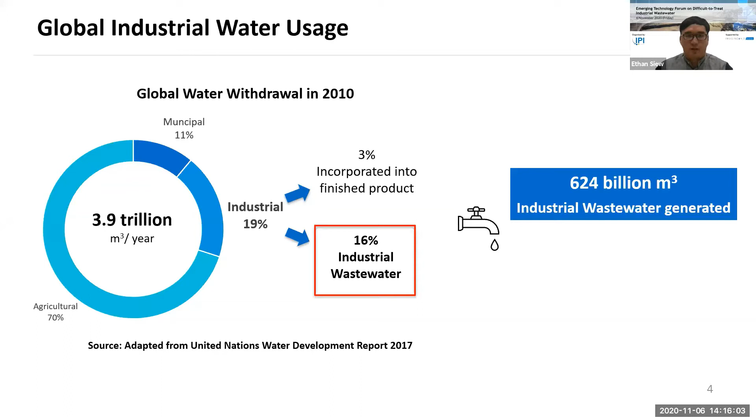Right here in Singapore, the situation is similar. The water demand is set to double from 600 million cubic meters in 2016 to 1.2 billion cubic meters in 2060. Non-domestic water, including water for industrial use, will grow from 55 to 70% in the same period.

With the rise in water demand and wastewater generated, the market will see a strong compound annual growth rate of 5.8%. The Asia-Pacific region is projected to be one of the fastest growing markets, growing 40% from 2019 to 2024. This growth is due to a growing population, rapid industrialization, and tightening discharge regulations in Asia.

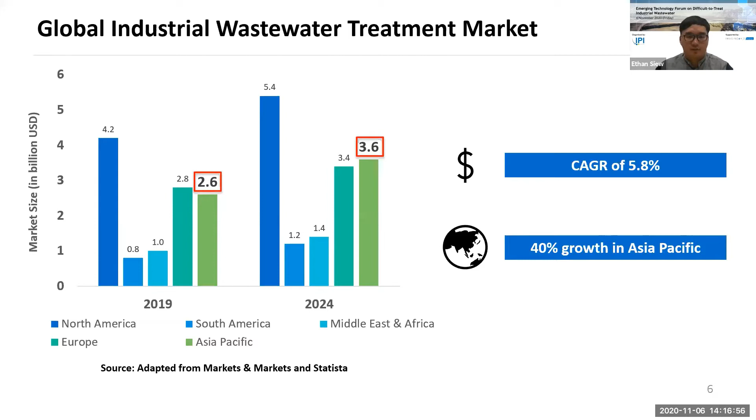So how do we manage all this wastewater? We can take some reference from the general waste management framework. When possible, avoid generation of wastewater through segregation of wastewater streams, or substitute the current raw materials with greener alternatives. Low-strength wastewater with low levels of contaminants is relatively easy to treat and should be recycled and reused when possible.

Mid to high-strength wastewater with heightened levels of contaminants can be challenging to treat and is required to be treated to a level fit for discharge as per the local regulations. If treatment is not possible, the wastewater will be sent for incineration. However, this comes at high logistical and management costs.

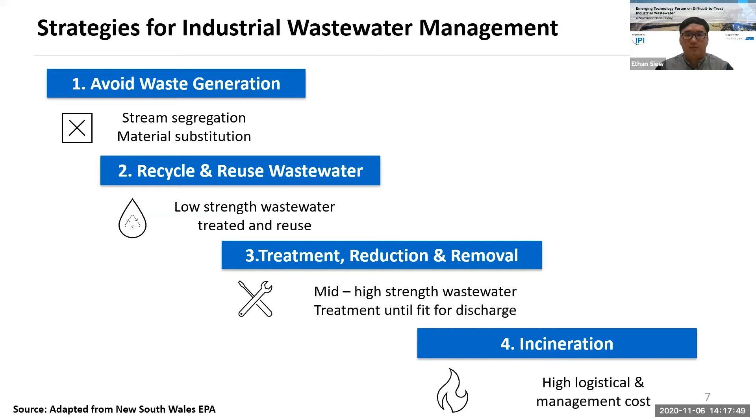Let us look at an example of how water is managed in Singapore's petrochemical and chemical industry. The bulk of the wastewater is generated by cooling towers and boilers. They are relatively clean and can be recycled rather easily. While process water takes up a small proportion of water used in the industry, the wastewater generated has high levels of contaminants and requires extensive treatment before it is fit for discharge.

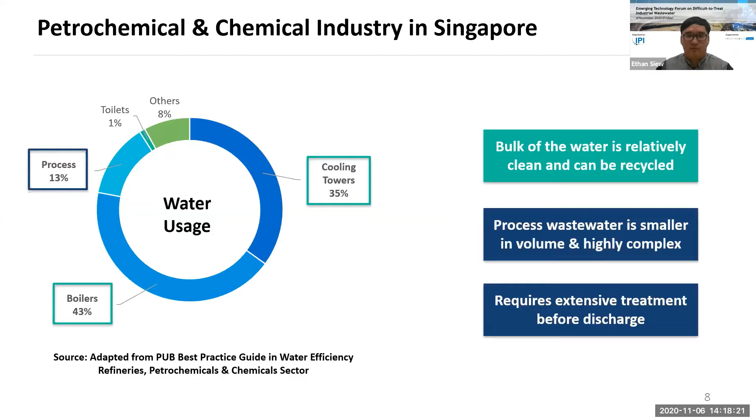We have seen the market trends in the industrial wastewater treatment sector. In this section, I'll be sharing with you some of the drivers moving these trends. There are essentially three key drivers for the industrial wastewater treatment market: the rise of industrial activities, tightening discharge regulations, and increasing environmental pollution awareness. First, we look at how industrial growth of key polluting industries gives rise to more wastewater.

The petrochem, textile, pharmaceutical, and paper industries are projected to see strong compound annual growth rates in the near future. However, things have changed significantly since COVID-19. Restriction of population movement has kept many people in their homes. Correspondingly, the energy demand for transport and commercial buildings has also fallen drastically.

For all the viewers watching this at the comfort of your own homes, I'm sure fashion has taken a backseat since the pandemic. At least for me, the only purchase I've made in the last few months were a few comfortable t-shirts.

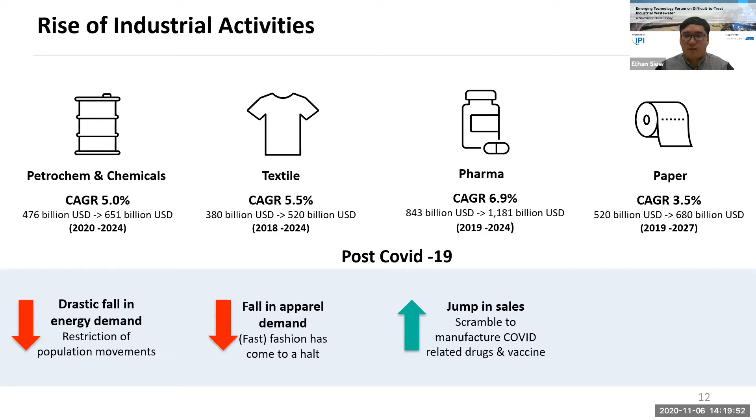It is not exactly all doom and gloom for all industries. There are still some bright spots. The pharmaceutical industry, for obvious reasons, has seen surges in its sales as all of us scramble to try and manufacture vaccines and COVID-related drugs. During the pandemic, the paper industry has successfully pivoted to making hygiene and medical-related products due to the increased demand.

Next, we look at some of the discharge regulations and related measures around Asia. Southeast Asia's largest economies, Indonesia, Thailand, and the Philippines, have seen their fair share of non-compliance for industrial effluent discharge. And this will continue to be a challenge for local regulators as the countries continue to invest in basic water and wastewater infrastructure to make up for the shortfall. In Singapore, PUB has ramped up efforts to detect and fine illegal effluent discharge, and tariffs are in place for discharge exceeding the regulations.

Looking beyond Southeast Asia, let us examine the situation in China and then in India. Before 2015 in China, there was little incentive for the polluters to recycle and treat wastewater, as the water prices and discharge fees were low. In January 2015, the Environmental Protection Law was revised to impose stricter fines and penalties. Enterprises were also named and shamed for environmental violations. In India, the effluent discharge of heavy polluting industries is constantly monitored in real time by the Pollution Control Board. The factories have to meet the discharge standards or face immediate plant shutdown.

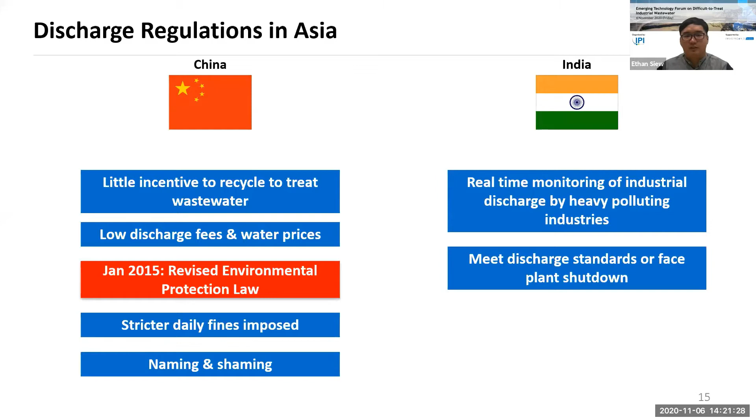Finally, let us look at a shift in mindset among investors and the general public towards environmental pollution. Investors are viewing practicing sustainability as a means to mitigate risk due to increasing regulatory and climate change. Likewise, consumers are demanding enterprises adopt sustainable practices in their manufacturing process. In response to that, the fashion industry has banded together to form Zero Discharge of Hazardous Chemicals, a foundation founded in 2011 by various players in the apparel supply chain to eventually eliminate any waste discharge during the manufacturing process.

At the minimum level, the Foundation seeks to meet legal discharge criteria and ensure effective control of chemicals in the restriction list. On the progressive level, the Foundation members should be able to apply advanced water treatment methods to address the wastewater issues. Lastly, on the aspirational level, no waste should be generated at all.

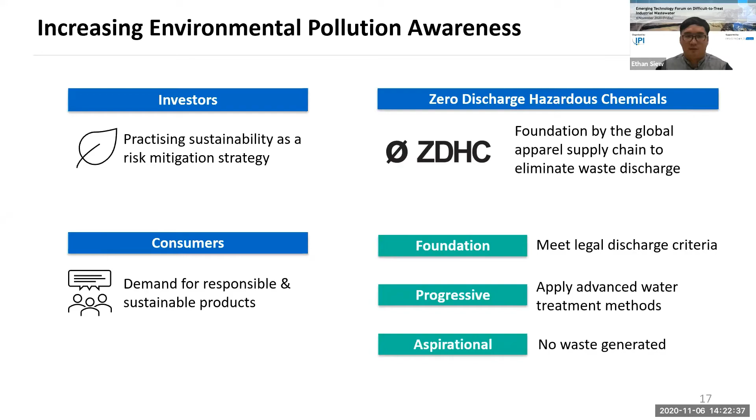I've shared earlier that the petrochemical industry is one of the industries that generate difficult-to-treat wastewater. In this section, I'll share with you what other sources of challenging wastewater are. But before we do that, let us take a step back and look at how industrial wastewater is typically treated. Clean water goes through the industrial process and becomes contaminated as wastewater. After that, it is sent for treatment.

The first step of treatment, also known as the primary treatment, physically removes the large particles such as suspended solids and oil and grease. Next, the secondary treatment step, comprising the biological treatment methods, reduces the biological and chemical oxygen demand by the action of microbes. Finally, the tertiary treatment step uses membrane processes to remove the remaining dissolved solids and salts.

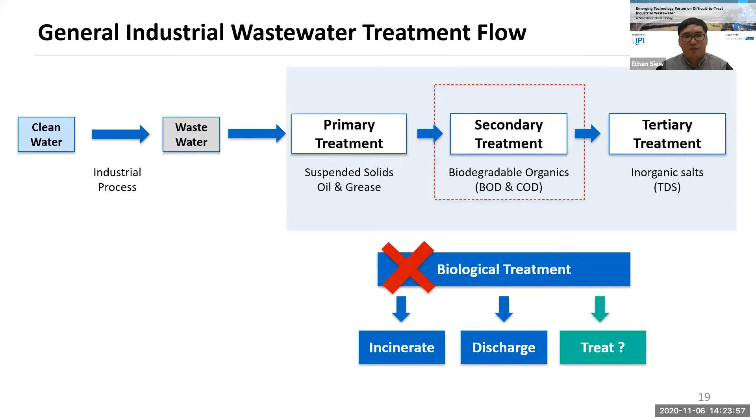But what happens if the biological treatment fails to remove some of the non-biodegradable organics? What options do we have? Well, we can either send it for direct incineration, discharge if paying tariffs is possible, or perhaps we can try to treat it. But what exactly are we trying to treat, and why are they difficult to deal with?

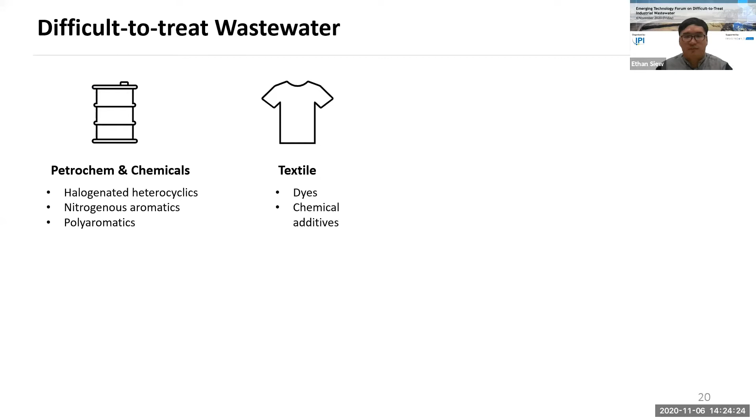Petrochemical wastewater consists of hydrocarbons with extremely stable cyclical and aromatic ring structures that cannot be broken down by the action of microbes in the bioreactor. Dye chemicals are engineered to be robust and bind strongly to fabrics. Likewise, pharmaceuticals are very stable compounds that will persist for a long time in the environment.

Paper manufacturing produces lignin, a complex polymer that lends its rigidity to wood, which is challenging for biological treatment methods. All of these chemicals are known as recalcitrant or hard-to-degrade organics, which are characterized by high toxicity and stability with low water solubility and bioavailability.

In some cases where recalcitrant organics are high, there are already industry players using different kinds of AOP, such as ozone, hydrogen peroxide, Fenton oxidation to deal with the wastewater. It can be used before the biological treatment to increase the biodegradability, or as a polishing step to remove the

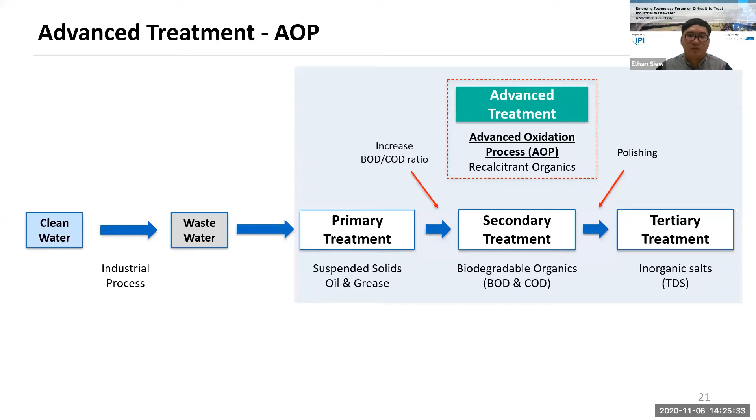recalcitrant organics. In some cases, where the recalcitrant organic levels are too high or the COD levels are too high, it may make more economic sense to further concentrate the waste stream to increase the calorific value before sending it for direct incineration. So on average in Singapore, it costs around 300 to 400 Singapore dollars for each cubic meter of wastewater incinerated.

I'll share with you some basics of advanced oxidation processes in this section before we look at some interesting AOP technologies. Advanced oxidation processes are termed as advanced because they are highly accelerated oxidative reactions. All AOP technologies involve the generation of some form of radical to initiate the oxidation reaction. The hydroxyl radical is one of the radicals that has high oxidation potential.

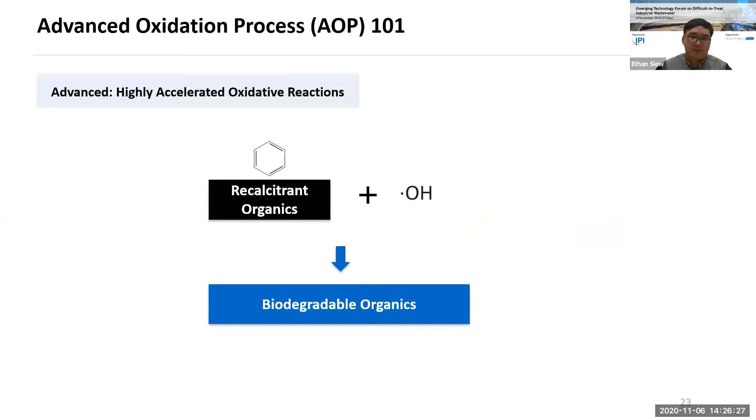Recalcitrant organics react with the hydroxyl radicals to form biodegradable organics, and they will further react with hydroxyls to completion to form water, carbon dioxide, and inorganic salts. So at this point, the waste is considered to be fully mineralized and can be disposed of easily. Let us look at how each of the AOP technologies stand when we put them in a technology readiness level versus chemical oxygen demand level.

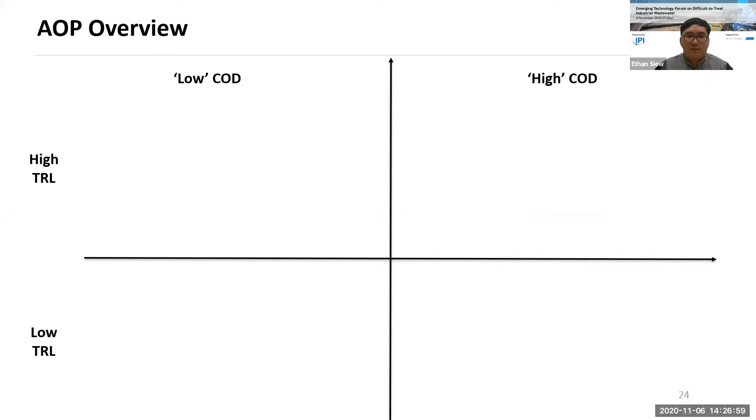We first look at a group of technologies under high technology readiness level and low COD. They are mainly hydrogen peroxide and ozone-based AOP. Reagent costs and energy consumption are important considerations. This group of AOP technologies might not be suitable to deal with high COD levels owing to the high operating costs. They are typically used as a final polishing step to remove low levels of remnant recalcitrant COD after the biological treatment step, and they are used rather widely in the industry.

The next quadrant consists of technologies such as pulse plasma, microwave, and electron beam oxidation. These technologies are extremely effective in dealing with recalcitrant COD. However, most of them are still in the lab or early pilot stage. This brings me to the last quadrant of technologies with high technology readiness level and the capability to deal with high levels of COD. And they are usually also cheaper compared to direct incineration.

Electrochemical AOPs is a class of promising AOP technologies which generate hydroxyl radicals via oxidation of water at the anode. Amrit from Indra Water will be sharing more about their proprietary electrochemical technology later. Dr. Oriana from Aquacycle will share more about how microbes can oxidize organics with bioelectrochemical treatment technology. UV or photocatalytic AOPs are efficient in breaking down organics. Zach from H2 Nano will tell us more about their reusable photocatalytic AOP.

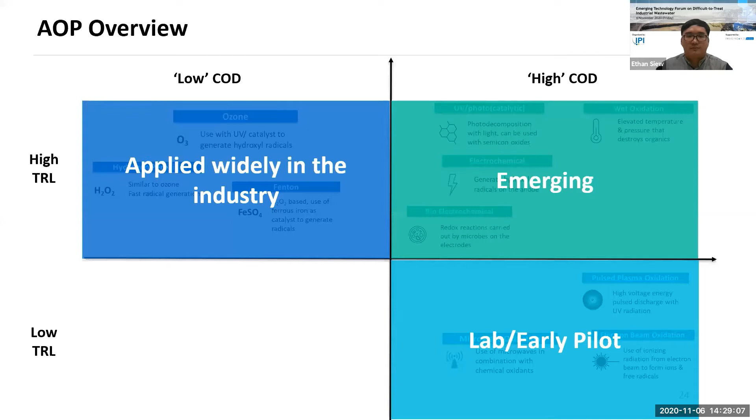Wet oxidation elevates temperature and pressure to sub or supercritical regions to destroy organics. Professor Matthew will be sharing more about his work on catalytically enhanced wet air oxidation. These groups of technologies are promising to deal with high recalcitrant COD and organics. Today, I'll be sharing with you 5 other promising AOP technologies for your consideration.

Superoxide radical oxidation is a relatively cheap chemical reagent-based AOP currently piloted in several locations across Europe for petrochemical wastewater and groundwater remediation applications. It is particularly effective against ring-structured and halogenated hydrocarbons. The superoxide radical is the strongest radical found in nature and can be generated in situ by a proprietary mixture of off-the-shelf chemicals at high pH.

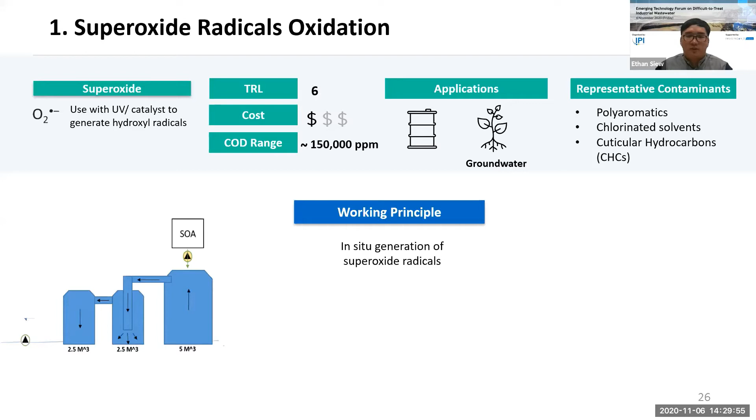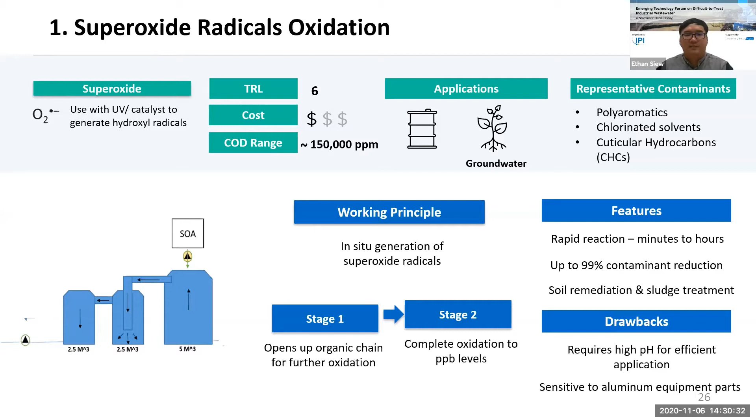The superoxide agent is applied directly to the wastewater, opening up the organic chains for further and complete oxidation to PPB levels. It is a rapid method taking only minutes to hours and can remove up to 99% of the contaminants. Notably, this technology can also be applied to soil remediation and sludge treatment. The only drawback of this technology is that high pH at pH 11 is required for efficient application, and the superoxide radical is rather sensitive to aluminum parts, so they would prefer stainless steel or plastic parts for the material of construction.

Next is a UV catalytic based technology currently being piloted in chemical and pharmaceutical applications. It is effective in dealing with phenolic and polymeric compounds. The UV interacts with reactive chlorine species to generate hydroxyl radicals for oxidation. Instead of breaking down the complex organics to completion, the reaction can be controlled precisely by IoT to polymerize and convert to a precipitate, which can then be filtered away with relative ease.

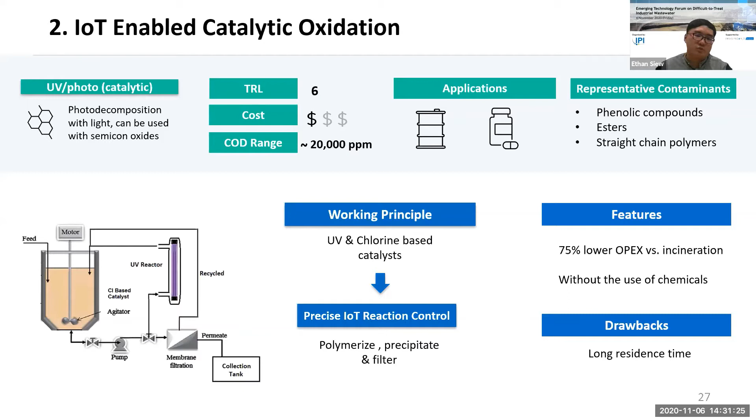It is 75% cheaper compared to incineration, and no additional chemical reagents are added in the process. However, this technology requires a long residence time and is only suitable for small batches. The third technology is a hybrid adsorbent and electrochemical oxidation technology. This technology is already deployed at full scale in several locations with various applications around the world. It is effective in dealing with dyes and BTEX chemicals.

The contaminants are first adsorbed by graphite-based adsorbents and oxidized by electric current. The hydroxyl radicals are first generated at the anode, and secondary radicals can be generated from chlorine-based contaminants. This process does not produce any sludge and produces only low levels of byproduct. Little maintenance is required, only 1 day per year. The drawback here is that hydrophilic contaminants are adsorbed rather poorly, and the process does not work well at salinity levels above seawater.

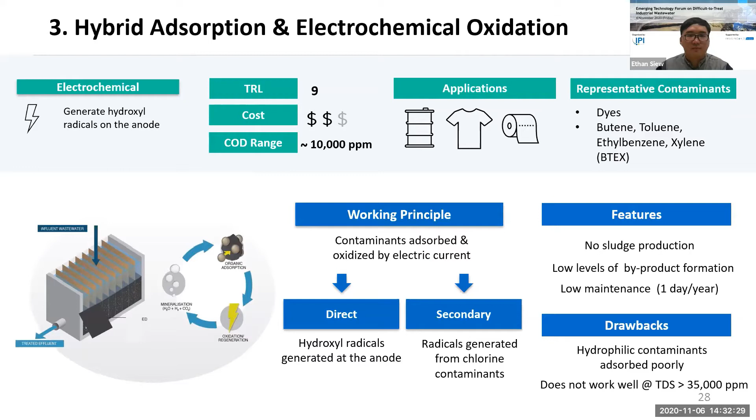Next, we have an electrochemical oxidation technology applied to pharmaceutical, petroleum, and landfill leachate. I would like to highlight that this technology is capable of handling COD levels of up to 1 million ppm for pharmaceutical wastewater. It can be used to remove key pollutants like aromatics, azo, and perfluorinated compounds.

The innovation of this technology lies in the titanium oxide electrodes. Instead of the common TiO2 electrodes, a more stable Ti4O7 electrode with 40% higher oxidative potential is used instead. It operates in a similar fashion as any other electrochemical oxidation, generating hydroxyl radicals at the anode.

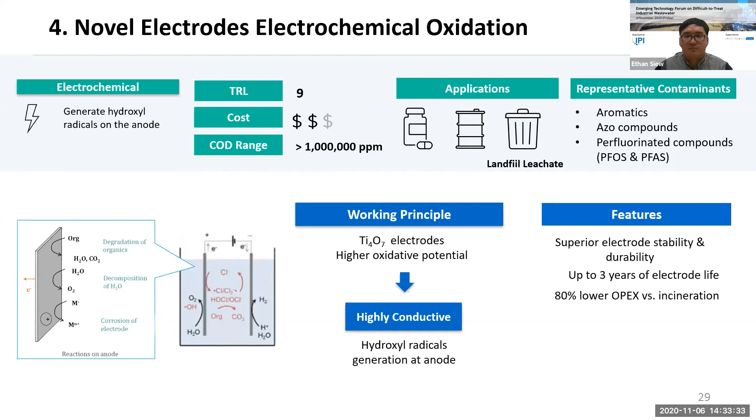The electrodes are extremely stable even in acid and alkaline conditions, with up to 3 years of electrode life. Overall, it is 80% cheaper compared to direct incineration. The only drawback here is that this technology is unfavorable for low TDS with trace pollutants.

Lastly, we have a type of wet oxidation process known as supercritical water oxidation, which can be applied to pharmaceutical, textile, and defense industries, treating key contaminants like pharmaceuticals, detergents, and perfluorinated compounds.

The wastewater is charged into a vertical reactor and raised beyond the critical point of water, above 374 degrees Celsius and 221 bar. At this point, the organics become super soluble and can be easily oxidized, while the inorganic salts become insoluble and precipitate out in solid form.

The OPEX values are half the cost of incineration, and the carbon footprint is 5 times lower compared to incineration. However, the system CAPEX and OPEX are relatively high, and the energy consumption is around 200 to 250 kilowatt hours per cubic meter of wastewater.

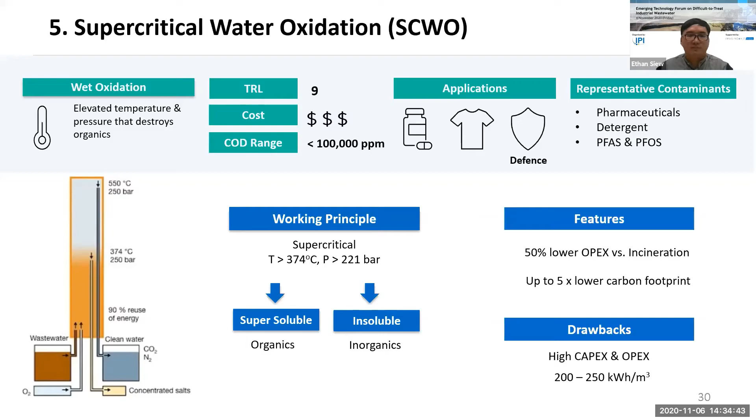In this section, we'll take a quick look at the patent landscape for using AOP to treat industrial wastewater. In terms of patent filing activities, the top countries filing for AOP patents are China, USA, South Korea, Japan, and Germany. In our analysis, we found that 1,292 inventions were filed worldwide from January 2010 to May 2020, of which many patent owners are Chinese entities.

Many of the patents are filed in China, indicating that this is a very big market. Nevertheless, the competition is also stiff, as there are many Chinese entities who have filed for patents in China. When we look at the patent owners from China, we realize that many of them are research institutes and universities, potentially indicating that AOP technologies are in the development stage. It is also likely that a lot of ongoing research needs to be conducted to address specific types of wastewater.

From our findings, we're not able to tell if there are any key market leaders in AOP. The technology providers offering AOP solutions vary from MNCs, startups, SMEs, and universities. Sinopec and Siemens Energy are MNCs that focus on using wet air oxidation to treat produced water from the upstream of the petrochemical industry.

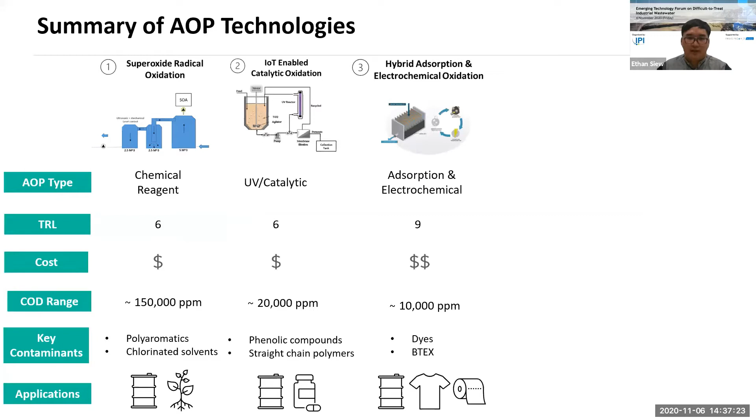A method that adsorbs contaminants for direct oxidation by an electric current. A novel electrode that has higher oxidative potential compared to conventional TiO2 electrodes. And last but not least, the supercritical water oxidation technology that oxidizes contaminants at high temperature and pressure. Each of these has its own pros and cons and suitability in different application areas.

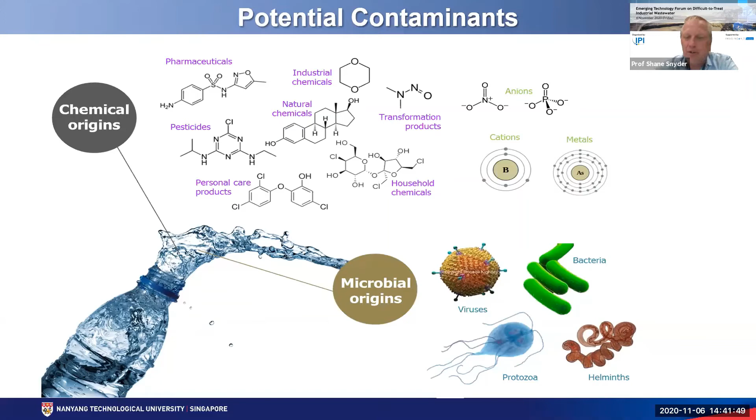So when we think about what could be in an industrial or even municipal wastewater, there are a lot of potential chemicals. They can be inorganic, such as metals, or organic compounds, such as pesticides or pharmaceuticals. But don't forget that in some industries, we still have to think carefully about pathogens. In fact, I serve on the World Health Organization Drinking Water Advisory Group, and we always advocate to think about the pathogens first.

So I'm not going to go into all these different options, but I think you can generally bin water treatment into three major areas. You can either separate, like a membrane, such as a nanofiltration membrane or RO. Of course, we can use biological treatment, aerobic, anaerobic, lots of different configurations, and oxidation or potentially reduction. So these are our major categories. But as Ethan mentioned, and I'd like to hit home on, sometimes the combination approach, though it may be more operationally complicated, can see gains in total efficiency.

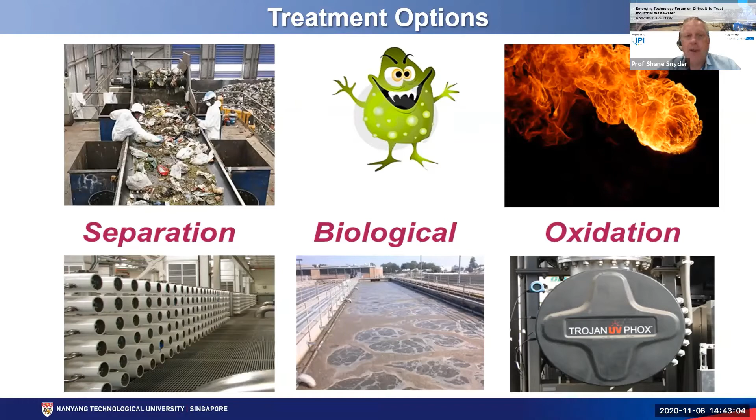And one I just want to mention now that I'm working on at NTU with NEWRI is looking at the potential for nanofiltration and using the brine or the reject water from the nanofiltration, which could reject most chemicals, contaminants, and then using that brine stream in the AOP process. Instead of treating the entire flow of water, maybe we can combine the nanofiltration or reverse osmosis and then treat the more concentrated chemical constituents with advanced oxidation.

But everything comes at a price. If we think about disinfection, obviously chlorine and ozone are quite good. When it comes to viruses, UV can be more challenging. But once we get into AOP, we're in a different world. But just to be aware that there are always advantages and disadvantages of the many types of oxidative processes that Ethan mentioned. Of course, if we go back, at least in my history, we were mainly using oxidation for pathogen inactivation.

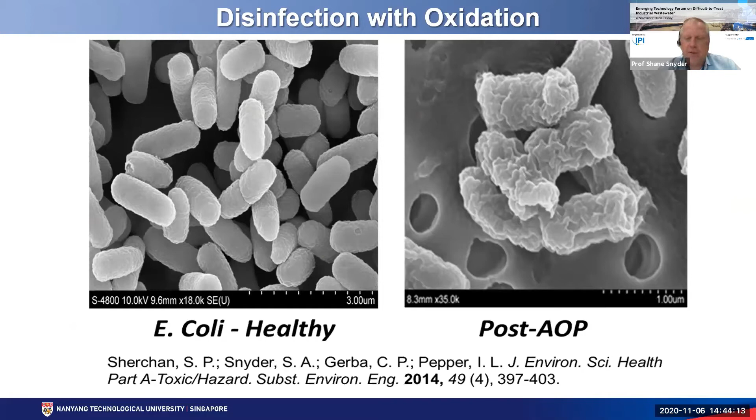And what we've demonstrated is that once we begin to form hydroxyl radical or superoxide radical, we not only can kill bacteria or viruses, but we actually begin to extremely damage their membranes and their ability to survive. There have been questions raised about ultraviolet light and whether it's inactivating DNA damage, which can subsequently be undone by different means. But when we're dealing with a strong oxidant, there is no question that the pathogens at the right dosage will indeed be dead and unable to be reactivated.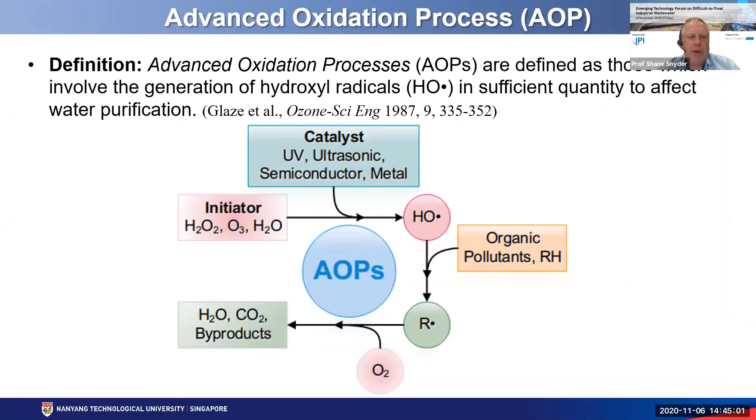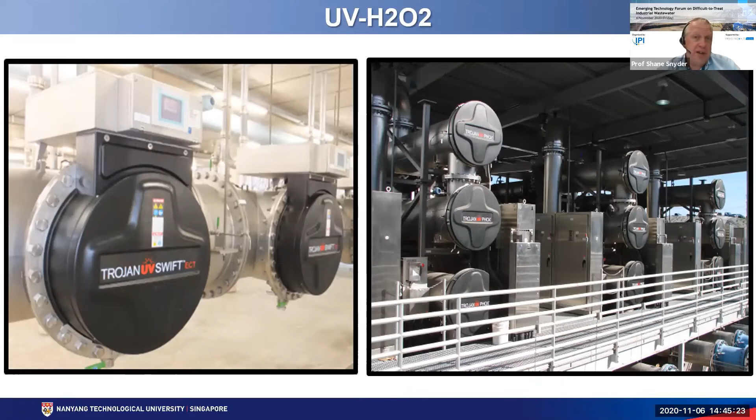Whoops, double. So I won't go into this. You know, there's various definitions, and I think, again, we already heard a lot about that. And here are just a couple photos. These are UV advanced oxidation reactors that I've worked with. On the left is one in the Netherlands in Amsterdam, and the one on the right is in Los Angeles. And the one on the right is actually treating water that's bound to be recycled back to drinking water, which actually contains a high degree of industrial waste as part of the source water.

So what are the reaction mechanisms? Again, I really don't want to go into this in depth. I want to point some special attention to the idea of using free chlorine and persulfate in lieu of hydrogen peroxide. There's a lot of gains that can be realized, especially if you're in a situation where you wish to keep a chlorine residual after this type of AOP. If you're using hydrogen peroxide or some other types of co-oxidants, you then have to quench those before you can add chlorine, which becomes quite expensive.

So UV chlorine really offers some really unique advantages, and this has now been built. I'm going to show you a photo of the pilot, but it has been applied at full scale in Los Angeles, California. And again, the advantage would be that once that water is treated with the UV chlorine advanced oxidation, it's actually using chlorine radicals along with OH radical, but it also will still carry a chlorine residual after the reaction, which can be beneficial, and it dramatically lowers the cost.

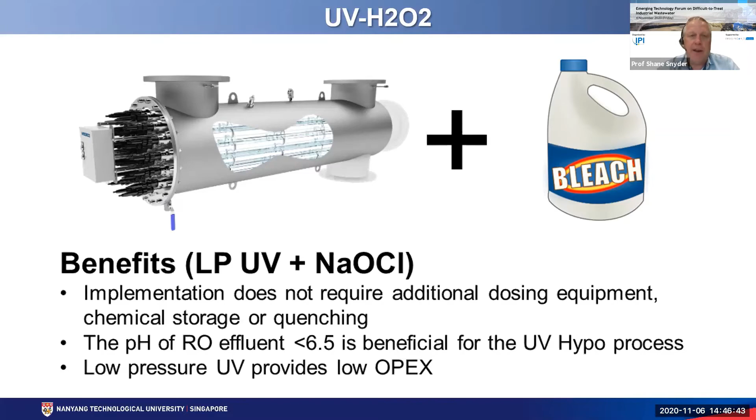Chlorine is cheaper than hydrogen peroxide, more commonly available, and is extremely effective in advanced oxidation. So again, this has actually at this point been built at full scale in Terminal Island in Los Angeles. So it's working well. And actually, although people may think there'd be a lot of chlorine byproducts, it actually forms less byproducts than chlorine alone.

So I want to talk about one of the big challenges that we've found with advanced oxidation processes, and that is process control. I only have another 5 minutes, but I want to give you a feeling that sometimes the trickiest part of an AOP is how do you control that AOP, especially if your water quality is changing. In a constant, reliable stream, if your COD is constant, maybe your dyes of interest are at a constant concentration, you may be able to set up a reliable set of operating conditions and just run. But that's not usually the case.

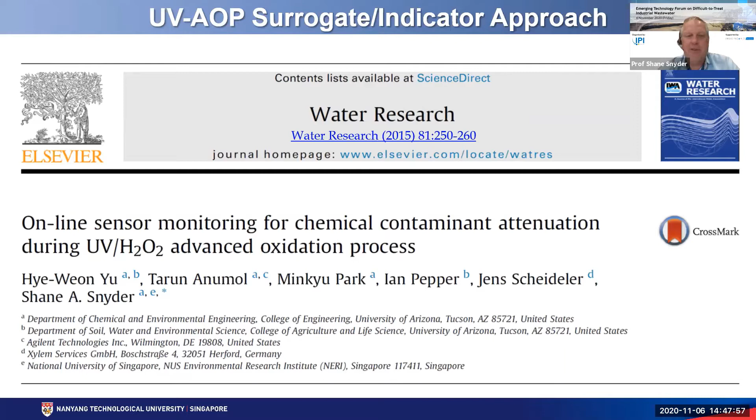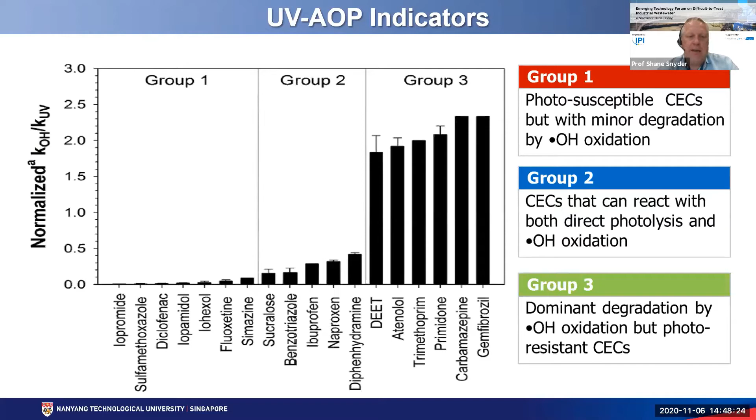And the challenge is there really are no online monitors that I'm aware of for hydroxyl radical, superoxide radical, chlorine radical. These species last for fractions of a second, 10 to the minus ninth of a second usually in their half-life. So what we began to do is we developed an indicator and surrogate concept where we can look at specific types of compounds which may be unique in different industries, but you can do monitoring of some target compounds and begin to know whether or not those are directly, in this case, photolyzed, or whether you need to add hydrogen peroxide or chlorine, and not have to measure every single chemical.

And what we're showing here is how we group them. We have some chemicals with the UV-AOP process that are directly photolyzed. They don't even need a co-oxidant like hydrogen peroxide. Some that are in the middle and some that are highly dependent upon OH radical.

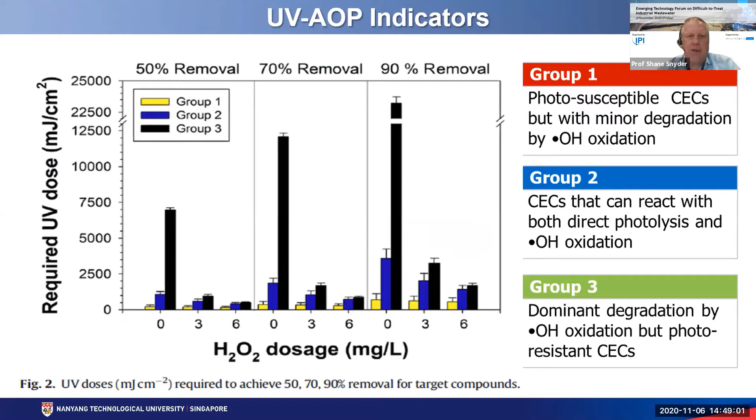So we must have the hydrogen peroxide feed. So we can use that information, we can begin to optimize the process, which is another question. If you're going to run a UV-AOP, how much peroxide do you need? And what we can show is that there are diminishing gains once we get to a quite high level of peroxide. So money can be saved if we can actually optimize that peroxide dose.

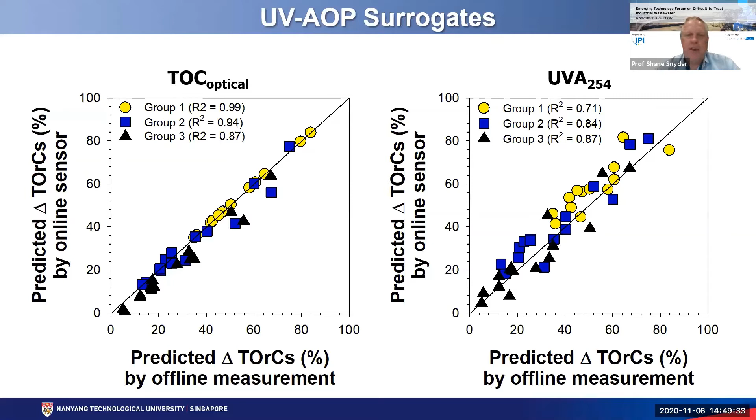So one of the ways that we do this is using optical technology or spectroscopy. On the left, we show a correlation between the different groups of chemicals and the prediction based on total organic carbon. And on the right, we show the same prediction based on ultraviolet absorbance at 254 nanometers. So the bottom line here is that we can actually begin to use online sensor systems to help us control this advanced oxidation process.

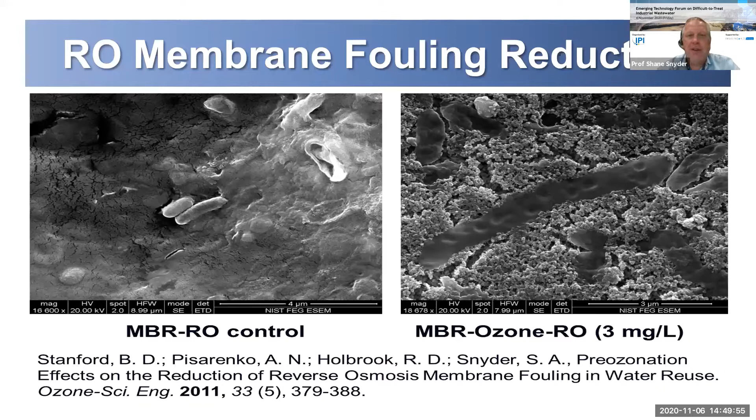Quickly, how about ozone? That's my second favorite. I've worked a lot on ozone over my lifetime. And one interesting application, just trying to show you the synergy, is when we begin to apply ozone ahead of membranes. Now, naturally, you may think, well, that's crazy to add ozone in front of a polymeric membrane. It'll destroy the membrane. But what we've shown is that at relatively low doses of ozone and ozone with hydrogen peroxide, we can actually reduce the fouling index or the flux decline.

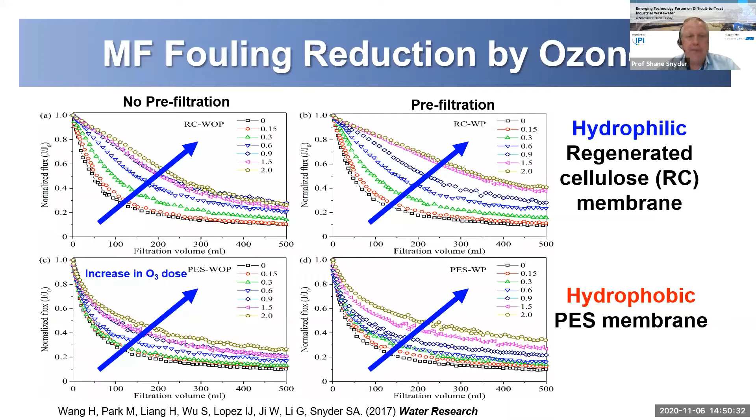In this case, we're trying to recycle a brine to get higher water recovery. And a major problem in the water industry is microfiltration, membrane filtration fouling. That is the membranes that are used for particle separation. And again, we've demonstrated that at relatively low doses of ozone, we get a quite big gain in flux decline. The membrane isn't fouling as rapidly.

This was done at full scale at another facility in Central California. And in full scale, what they realized was that they did indeed have polymeric membrane failure. There was no ozone residual reaching the membranes, but the problem is that online sensors currently for ozone residual could not measure at that low of a concentration.

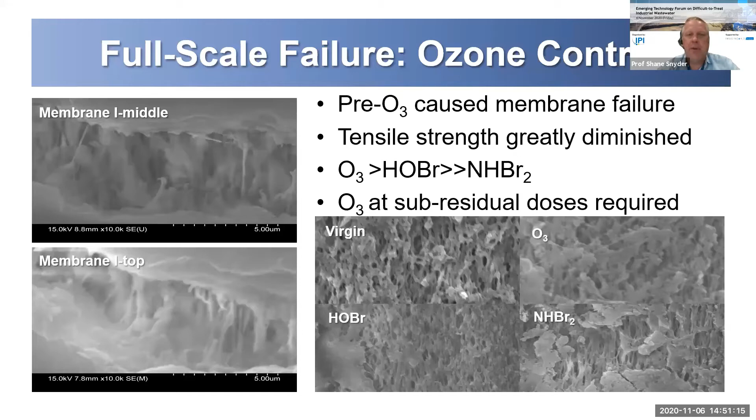There's also interesting chemistry that happens when you begin to add powerful oxidants. You can begin to oxidize things like bromide to hypobromous acid. If ammonia is present, you can even form bromamine. So all of these can impact the membrane. So you have to be very careful at how to control that process.

So we have looked and developed algorithms that use both UV-254 transmission or absorbance on the left of the screen, or fluorescence on the right. Now, fluorescence adds some big value because the linear range is longer and the correlations tend to be a little better, but it's really the dynamic range of fluorescence that gives it a big benefit.

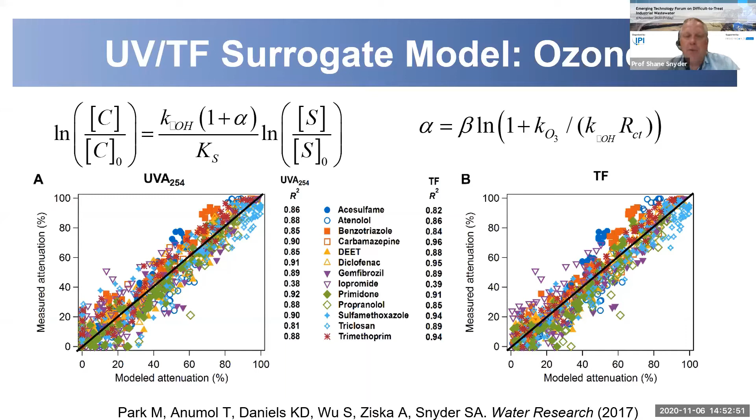And what we're showing is the correlation of the oxidation of various emerging type contaminants, in this case, mainly pharmaceuticals, and how well we can predict them based on the fluorescence or UV patterns. And this is a way we can now control that ozone system. And for instance, if you're dealing with a water that may have nitrite, nitrite has a 1-to-1 molar ozone demand. In other words, the nitrite will rapidly quench that ozone. So if you're adding hydrogen peroxide, you may never realize it's happening till it's too late. So our method provides one way of process control.

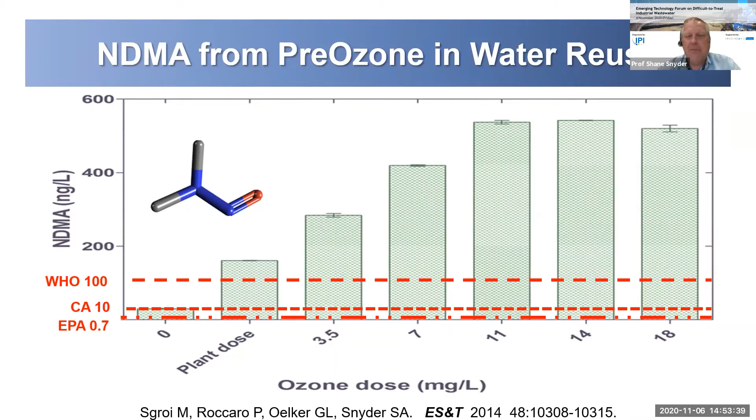Lastly, I just want to make sure that people realize that no good deed goes unpunished. As you begin to oxidize water, whether it's advanced oxidation or conventional, you will begin to form byproducts. And in this example, we are adding pre-ozone before the membranes, and we formed nitrosodimethylamine, which has a standard of the WHO at 100 parts per trillion, California at 10, EPA 1 in a million cancer risk at less than 1 part per trillion. You can see that as we oxidize, we form a high level of this byproduct. So in a potable reuse or even discharge to a source water, you really need to think about those potential byproducts. Quickly, how does ozone AOP compare to UV?

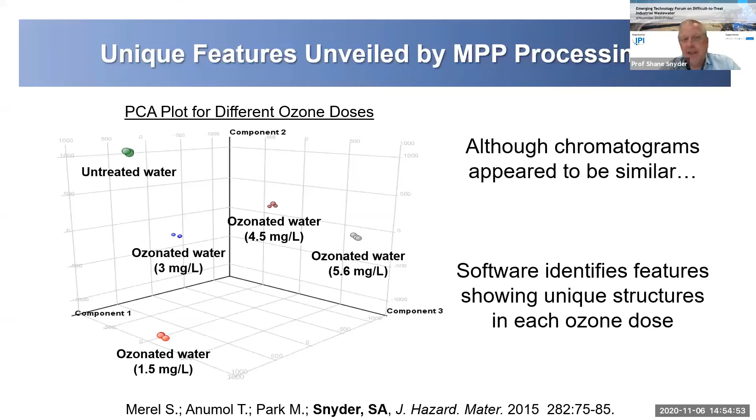And if we look at that with high resolution mass spectrometry, I'll jump through this, you can see very, very statistically significant differences in these waters. So it means that some compounds are being formed, those are byproducts, while other substances, hopefully our chemicals of concern, are actually being removed, but again, not really removed, but actually being transformed. And sometimes that transformation can lead to something potentially more dangerous than you started with, such as a case we studied with benzotriazole, a common corrosion inhibitor. When adding ozone or hydroxyl radical, it forms a dicarbaldehyde. So you have to be cognizant of the byproducts.

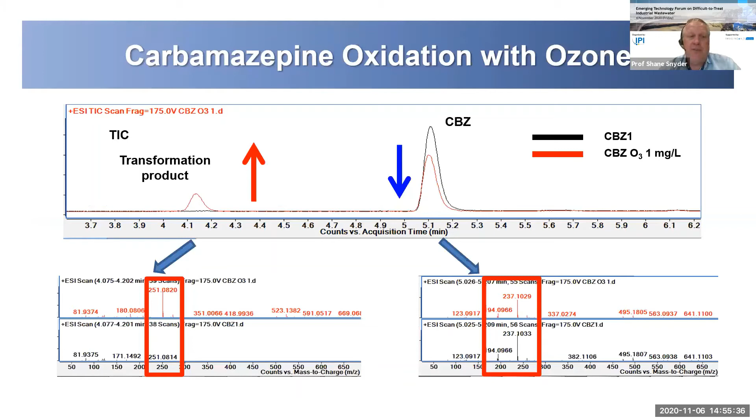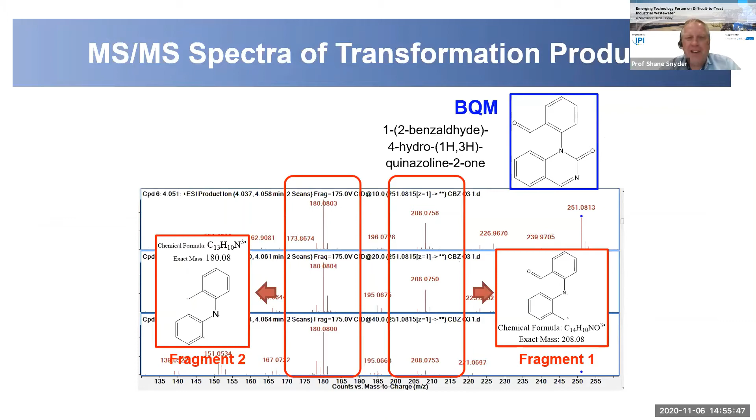One last example for the pharmaceutical carbamazepine. Again, as we add ozone at low doses, we see a very stable transformation product. In this case, that transformation product is BQM, which is known to be highly toxic. So just be aware that when you're applying these things, you do form some level of byproducts.

So what do I see as the path ahead from my experience in 20 years in the industry? Well, one of the exciting areas will be combination approaches. For instance, ceramic membranes combined with advanced oxidation, whether it's ozone, ozone peroxide. But at NEWRI, at NTU, we're working on catalytic membranes. Those membranes will have the properties to form an advanced oxidation or OH radical based on molecular ozone conversion. And I'm excited to say we are always looking for partners.

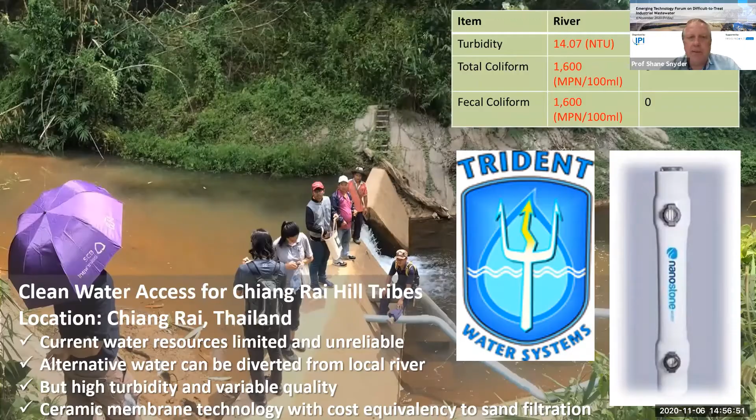We are happy to be working with the Trident Corporation here in Singapore on electrocoagulation, looking at options for Fenton reactions, and then combining those with a ceramic membrane. And through our philanthropic efforts, we are going to apply the system to a quite needy group in Chiang Rai in Thailand. And part of this idea is, can we put the best available technologies at an economical price into the hands of the people that need it the most? And of course, key to the success will be online monitoring, Internet of Things, and real-time sensing and control.

So I hope I left you, quite rapid, but an overview of some of the areas that we can think about.

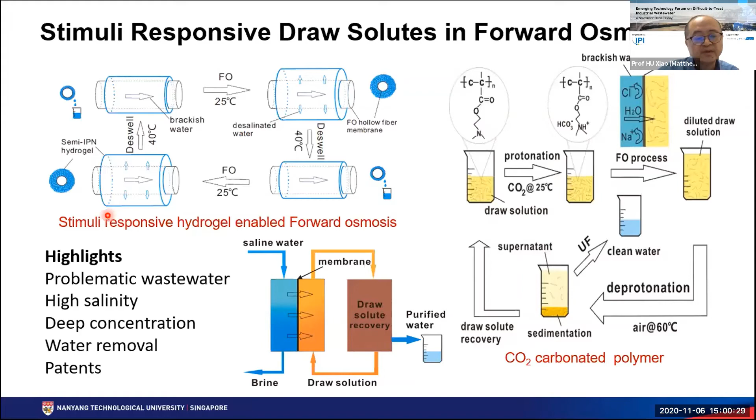So the second example I want to show is that we have a cryogel, a hydrogel for a water purifier. We are able to use the polymeric hydrogel that absorbs water, and then after you gently squeeze, you can treat it within 5 minutes. You are able to turn turbid, pathogen-contaminated water into drinking water, fulfilling the requirement of UNHCR emergency drinking water.

So we can achieve 6 log bacterial reduction, and at the same time remove heavy metal and turbidity. We only need 4 grams of gel, and each time we need 5 minutes. We can reuse it 30 to 40 times, so each 4 grams of gel is able to generate 15 liters of drinking water, and it's very low cost.

And when we filed the patent, we actually won quite a bit of media attention, and also some attention in the scientific community. So right now, we are trying to look for partners to bring this technology into the market. We already have prototypes and also a second round of prototyping. And this is the example.

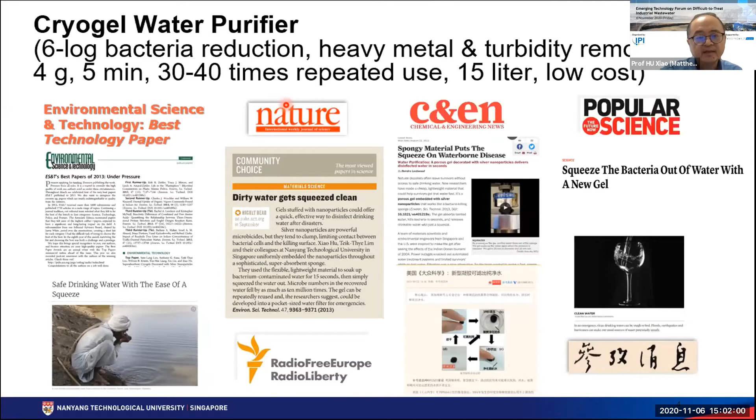Okay, so advanced oxidation. Shane just mentioned the ceramic membrane, catalytic membrane, and oxidation. As material scientists and chemical engineers, we synthesize new materials and try to integrate those catalysts either onto the membrane surface or into the membrane body. As the wastewater flows through, the foulant will be rejected, while the oxidant will be activated by the catalyst, even at the surface to prevent fouling.

Once the water enters the macro- or microporous membrane structure, inside we also have catalyst, and the oxidant is activated by the catalyst to form reactive oxygen species and transform or mineralize the organic compounds. The interesting part is that, depending on what material we use, we could also utilize photocatalysis, and Shane mentioned UV/ozone and UV/H2O2. We could also introduce electrocatalysis in this membrane, depending on what material we choose.

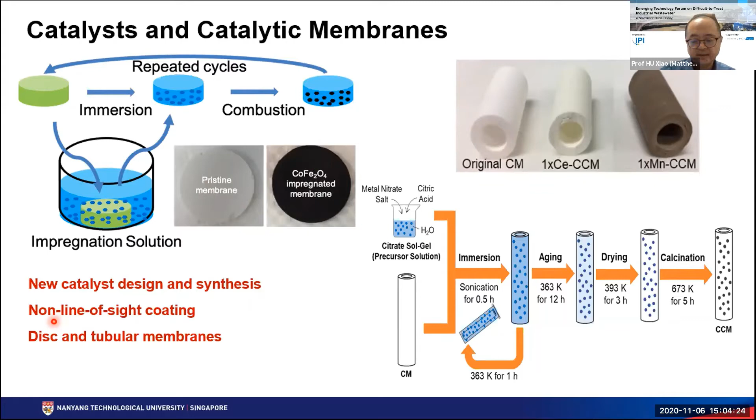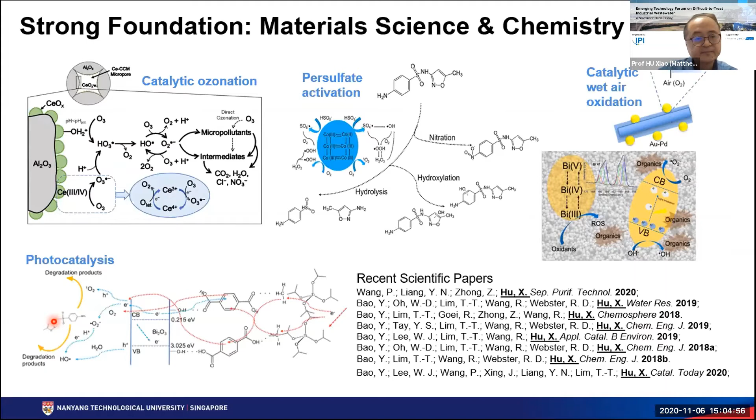But we are keenly aware that we need a very strong foundation in understanding the chemistry, material science and catalyst development in order to have some breakthrough; without mechanistic understanding, it's very hard to have a breakthrough. So we spend a lot of time understanding the mechanism, and especially transformation intermediates are also very important, as Shane has already articulated. So now let's look at catalytic wet air oxidation.

So our interest is really in trying to develop a catalyst that will activate oxygen in the air into reactive oxygen species, but at a relatively low temperature, and hopefully at ambient, atmospheric pressure.

So right now we have tested this concept: we synthesized a range of nano catalysts, and then we immobilized them onto the membrane. And this is a simple configuration for how we do the test. So here is the membrane cell, the feed water going through, and then we have control, and then the clean water comes out.

So I think in the literature, or in industry, most CWAO requires a high temperature and a high pressure. So here we are now able to show some results, and we used several of the dyes. Here is one of the examples. So for example, I just want to show.

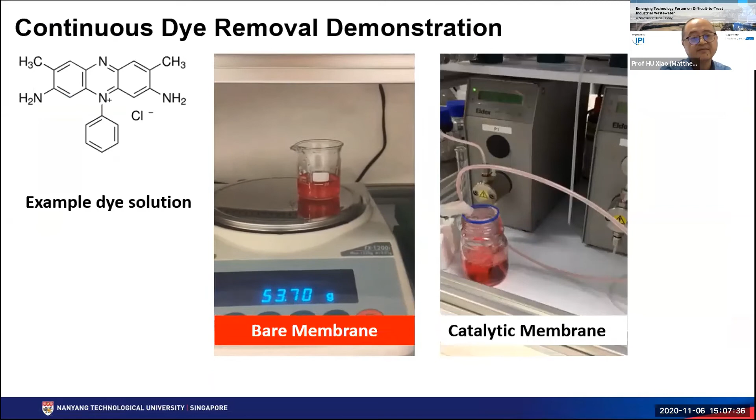Yes, okay. So as I mentioned, very quickly, you can see this is without the catalyst, and the water still remains very much intact. And then we simply coated this catalyst onto the same membrane, and the water came out clear. So that's actually the membrane process.

So I was thinking, can we make it even simpler? So we said let's design a catalytic air diffuser, because aeration is also one way, and it's been used for water treatment, even for pathogen control, and also to reduce the odor and all that. So we just simply have an air diffuser.

This is what we use, and what we did was treat this air diffuser with the catalyst, and then with barely 10 minutes of bubbling air, this is the original water. After 10 minutes, the water became very pale. So this is what we have seen.

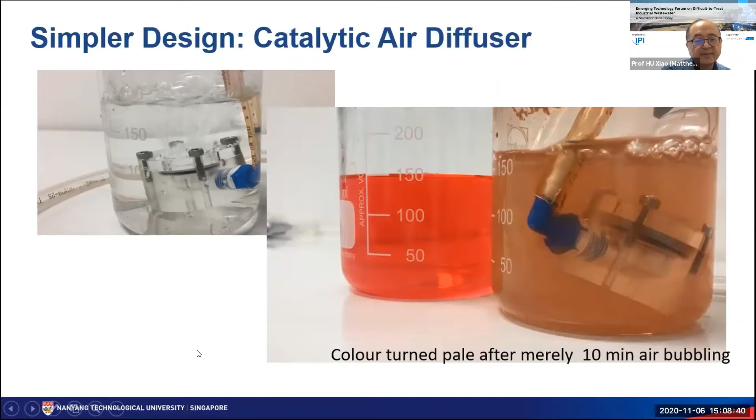So one of the things we can see is the DOC removal: if you use just the membrane without the catalyst, very little removal. But after we have a catalyst, the removal is more than about 95%. And if you use a membrane plus the catalyst as a powder in water, it also has some good removal, but it's not as good as the membrane integrated.

So here, if you just use alumina, aluminum oxide, without catalyst, you don't see a color change. And with the membrane, in 10 minutes you already see the color visibly start to diminish, and at 40 minutes it is really much clearer. So the powder still works, but it's less effective.

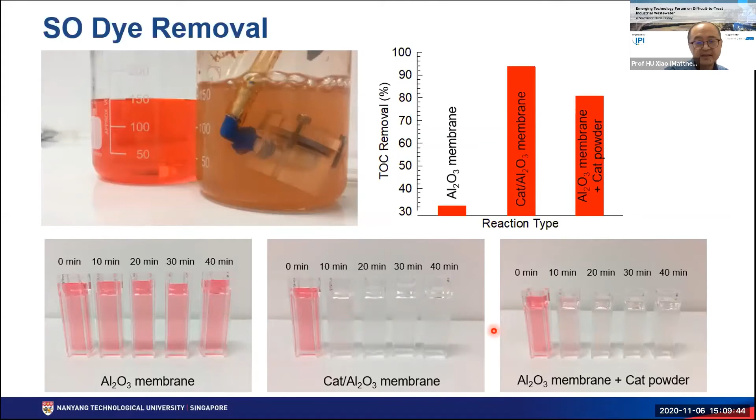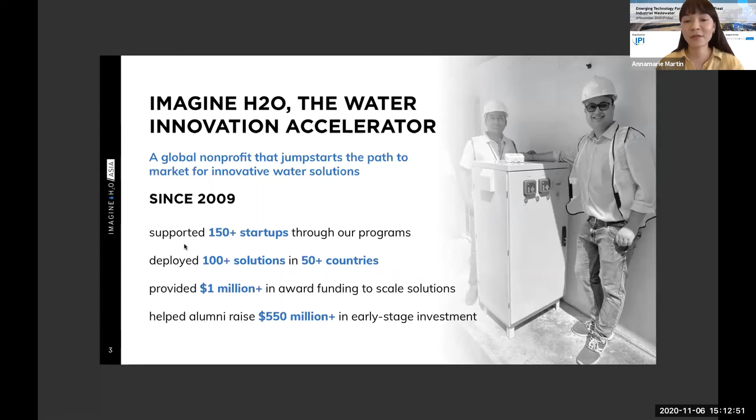So here's some quick statistics to showcase our record over the past 10 to 11 years, where we've helped a total of 150 startups, deployed more than 100 solutions, provided $1 million in funding, as well as helped alumni raise around $550 million in early stage investment. So as you can see, we work across a very wide range of water startups, including themes like network management and leak detection to water and wastewater treatment. So particularly what we've noticed over the past few years is that we are seeing growth in the number of startups in the themes of water and wastewater treatment, as well as drinking water access and delivery.

So every year we have over 500 companies apply to our programs. So we run 3 programs in total, where in addition to our accelerator programs, we also have a global competition called the Urban Water Challenge that provides pilot funding for startups. So while the accelerator programs help the startups in a number of ways with things like mentorship and visibility, the Urban Water Challenge is focused primarily on funding support.

Our program comprises 4 key pillars. So first, we provide advisory and mentorship, where we connect our startups with technical, market, and investor experts to provide advice for them. Next, we have pilot funding support, which is usually modest, but is aimed at removing some of that sting that's usually associated with starting a pilot with a new customer and having to pay for that upfront cost. We also provide customer and investor access, where we rely on our ecosystem partner network to make introductions to utilities and manufacturing and industrial players in the region. And finally, we provide industry visibility for the startups, usually by showcasing them at major trade shows and industry events.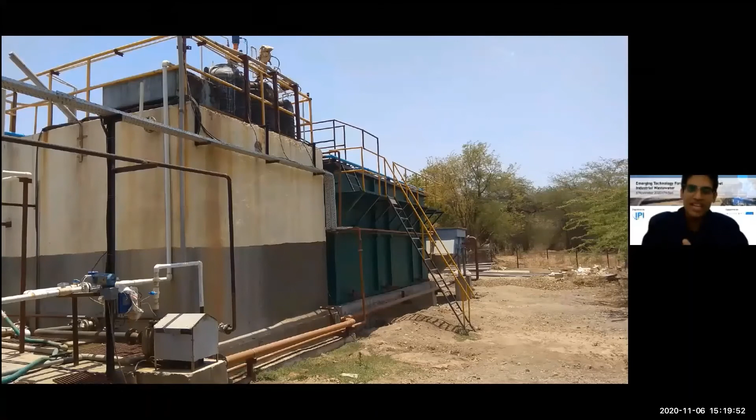We all know that all this wastewater from different buildings, different houses, multiple industries, is all pumped to a single large infrastructure for treatment. But this process is inefficient, not only because there are energy losses, but we lose a lot of water because this infrastructure is difficult to maintain. It also becomes extremely difficult for an operator, even if a plant is completely automated, to react to changing wastewater requirements. Sometimes, before we realize that something is wrong with the plant, a huge volume of water has actually passed through without getting the right kind of treatment.

But that is pollution happening right there. A huge amount of solid sludge is also generated by these plants. And most of the time, this sludge cannot be directly reused, as a lot of it is due to the industrial effluents that have come into the plant. Indra has been trying to solve a lot of these problems right from the word go. Our solution is compact and smart, and our solution is electrically driven. Our patented physioelectrical process is effective and efficient and performs coagulation, advanced oxidation, and disinfection of domestic and industrial effluents, and we recycle this water for non-potable reuse applications.

Our systems are plug and play. Because we do not use any chemicals, and we have eliminated the complete logistics chain associated with that, we're able to save 40 to 50% in operating costs and 35% or more on life cycle costs. Because our systems are electrically driven, our electrochemical processes happen instantaneously, thereby dramatically reducing the retention time required in our systems. Hence, our systems are 75% lower in footprint. Now, that is a lot of productive area available for industries. It adds to the economic viability of our projects. We recover 95% of the water that we treat.

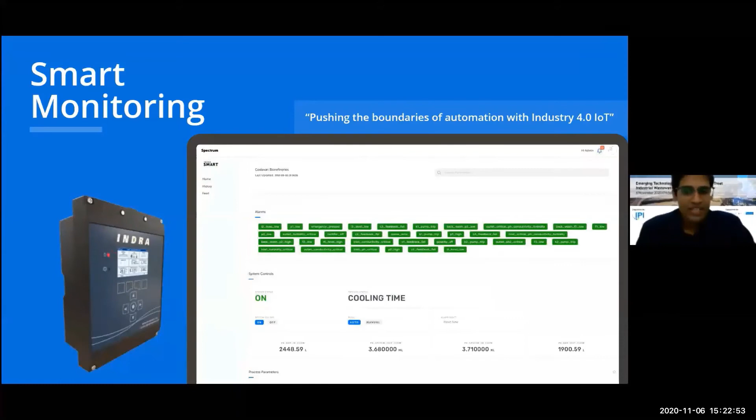We are primarily operational in the real estate market, that is sewage treatment in domestic as well as commercial buildings. In textiles and dyes and paper and pulp, we're treating effluent water. And this is our primary target market in India. This market is $4 billion in size, and it is growing at more than 15% year on year. That is a massive opportunity.

We are egged on forward by the stricter regulations and mandates for setting up STPs and ETPs in the country. Rise in cost of fresh water and the huge gap between demand and supply is a massive opportunity for us. Even in the Southeast Asian market, the whole market is growing at 8.8% year on year. And less than 20% on average of the wastewater generated is treated in our target segments in Singapore. That again is a great opportunity for us.

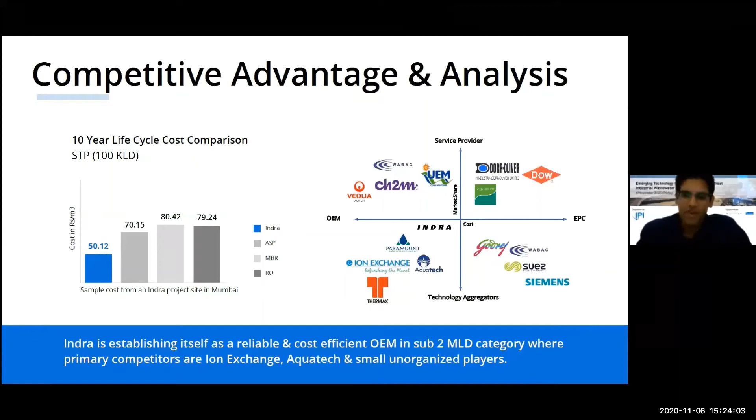As you can see from this graph, we are very competitive with respect to all the other players in the market, and our 10-year life cycle cost for a sewage treatment plant has been displayed here. All values are in rupees per meter cube as observed in our projects in India. We are primarily operating in the sub 2 MLD category in the country.

Some of the projects that I would like to mention are a 75,000 to 100,000 liters per day biorefinery plant that we set up, and we're able to recover almost all of the water for non-potable reuse applications as well as industrial processes. 50% cost reduction, 75% reduction in footprint, and 75% reduction in sludge has been achieved.

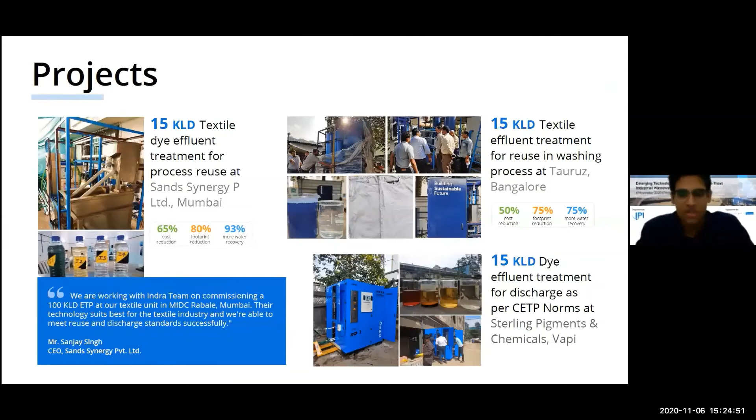We have also deployed plants in lakes for water reclamation for the purpose of irrigation, especially in the city of Hyderabad. In some of our textile projects, we have been able to reduce the cost by 50% and obtain 75% more water. And the water that we are supplying back at the source can be directly reused in the sensitive jeans washing process.

All our activities have resulted in saving 200 million liters of water, and this number keeps rising. 500,000 people have been positively impacted by our actions. We have worked with a lot of large clients and partners, and we continue to work with the best in the industry to promote our technological prowess as well as partner with them for improving our work. Imagine H2O has been instrumental in this process.

Our team consists of myself, Krunal, Abhijit, Aditya, and Shriteja, and we have a lot of good experience from the likes of Amazon, Tata, Bosch, and we bring all this expertise into quicker deployment of our solutions in the market. We were the recent winners of the Urban Water Challenge at the World Water Week in Stockholm. And we have also won the Millennium Alliance Award very recently.

Our plan for expansion in Southeast Asia involves partnerships and collaborations in technology, operations and maintenance, and also deployment of projects. We are also open to technology licensing because it is very important to understand that local problems require the involvement of existing local players. And we believe that our technology can be improved with their feedback. So we are willing to work with all the players in the local market to efficiently deploy solutions that are more economically viable and help us make water recovery and wastewater treatment more sustainable in the long run.

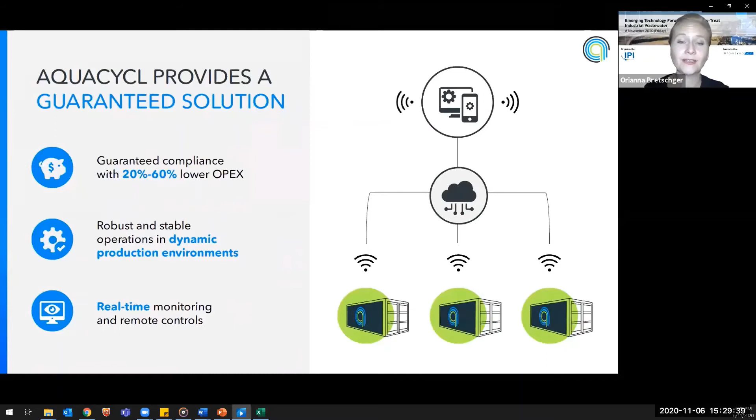And we provide real-time remote monitoring and controls, which really helps to catch issues before they become problems and alleviate the requirement for a full-time 24/7 operator on site. We can catch anything before it becomes a problem and make sure that we call a local service provider to do whatever maintenance or emergency response may be required. That means minimizing any production shutdown for the client.

Now, what I'm showing you here is a breakout of the actual product. And so what we offer is the bioelectrochemical treatment technology, or BETT, which is that little black box that you see in the image. Now, each one of those reactors is about the size of a standard car battery. They're quite small. And we stack them together like Legos inside standard size shipping containers, a 20-foot or 40-foot container, depending on what the customer requires.

The number of reactors that we have operating in hydraulic series, for example, 40, will define how much carbon we can remove in a given hydraulic residence time. And then we have multiple parallel treatment trains that will accommodate the volume at the customer site.

Now, this is a bioelectrochemical process, and we use naturally existing bacteria already present in the wastewater and/or sourced from the local environment to run the process. We bring these bacteria in with the wastewater that we want to treat, and they start to form biofilms or fixed films on the internal surfaces of each reactor, those little vertical cylinders that you see in the breakout there.

Now the bacteria attach to those cylinders and they start using those surfaces as a way to breathe, or a way to respire. And in that respiration process, they're giving up electrons. We harness those electrons, we move them across the circuit, producing DC power. Now, the faster we move electrons away from those bacteria, the faster we're making them breathe. And when they're breathing fast, that means they're eating fast. And so the more electricity that we produce actually leads to faster treatment rates.

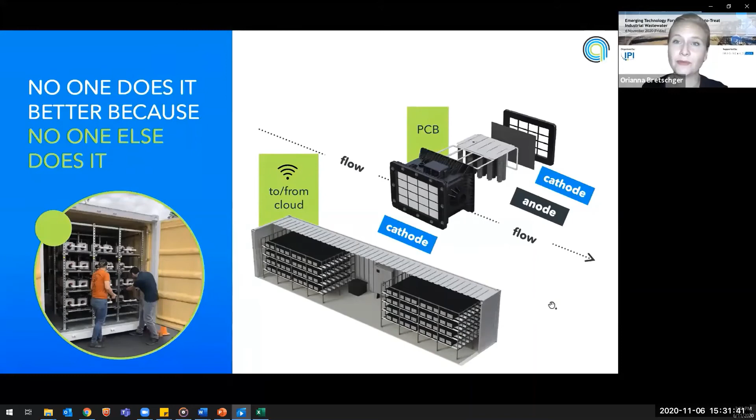And so you see the picture here. That's actually an example of one of the systems we built for a small brewery here in Southern California. We have manufacturing established already in South Korea, Tijuana, and here in the United States. Here are some examples of some of the installations that we've done with various customers, both in the US, multiple states, as well as in Tijuana, Mexico.

We're also generating useful power in this process. 1.6 kilowatt hours per kilogram of COD was recovered in this process. And that equated to around 22 kilowatt hours in a day, which is about 50% of the total power required to run the system, which was about the size of a Fiat in relative footprint. We also have some of the lowest secondary biomass production values relative to other technologies.

Now, how we would stack up technology to technology in terms of full kilograms of COD removed per day, we offer some of the fastest treatment times on the market, the lowest secondary sludge production that you can see, as well as some of the best energy recovery efficiencies relative to conventional anaerobic treatment. And we're doing this in hours as opposed to days.

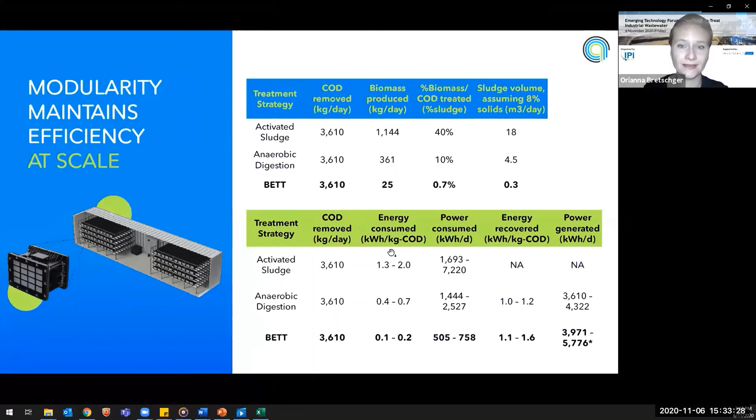And so we're very excited to work with our global clients, always seeking customers that are looking to solve issues with high sugar, high solids, and high surcharges wherever they're operating in the world. And we're always also seeking channel partners and local participants to provide that on-site service to our customers on a global scale.

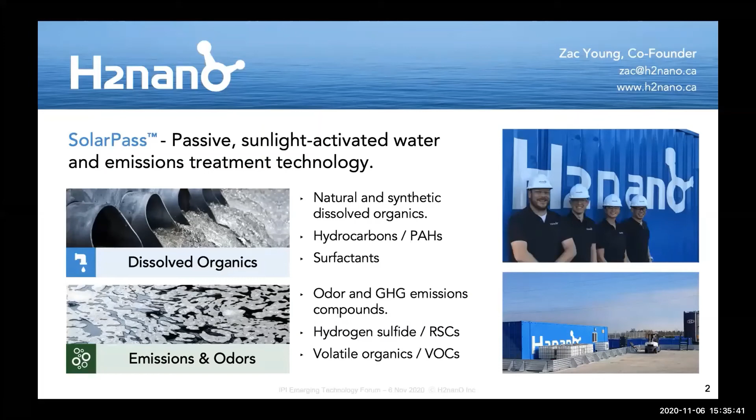So what H2 Nano has is a passive advanced oxidation treatment. And to tell you a bit more about how that contrasts with conventional oxidation, chemical oxidation technologies, as you will know from the conversation today, have a high treatment strength. They can eliminate a lot of recalcitrant organic contaminants. However, these are very intensive chemical and energy input processes. And so a solution that doesn't require those input intensities would be beneficial.

However, biological treatment processes, which may be more passive or moderate input, have a lower treatment strength and in fact can generate some of these odorous compounds as well. And as a whole, don't address the full spectrum of treatments that may be required. So what H2 Nano has done is brought the merits of these two together in our SolarPass technology. So it has a high treatment strength. We're able to eliminate the same kinds of contaminants that chemical oxidation can take care of. In fact, in some cases in a more targeted and accelerated way.

But it does this with a sunlight activated process where we're using direct green sunlight power to do that treatment without intensive electrical inputs. And this passive and low input process ultimately reduces the chemical input burden. It doesn't have a substantial waste stream, or in some cases any waste stream coming off of the system as a reusable material. And all of that drives down treatment cost and improves the scalability of this process, especially in industrial wastewater settings.

So the way that SolarPass works is through a material and process innovation that enables us to deliver that passive treatment approach. So the treatment occurs through the water surface, where we use sunlight as our energy source. And H2 Nano's proprietary materials float near the surface to absorb that sunlight and use that to passively and with high strength apply that advanced oxidation to contaminants in the water.

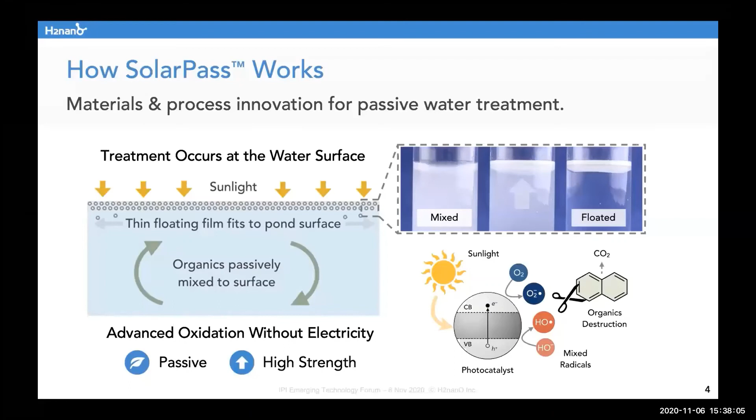So the SolarPass technology is a platform that can be applied in a couple different manners. One of those is a conventional, once-through treatment process where either upstream or downstream of a current treatment application or as a standalone process, we can accept water, perform the treatment with our treatment material, and then at the end of the process, we recapture for reuse the catalyst material.

And the only thing leaving our treatment process is fully treated water that meets the specification required, using process controls where we can monitor the amount of energy input from the sun and adjust our dose and mixing of the material to deliver the treatment needed.

We can also deploy this in pond, so treatment using H2 Nano's in-pond booms and containment structures to be able to deploy our treatment material directly to treat or cap and contain emissions in a conventional treatment pond or lagoon setting.

So this works in a variety of different industrial treatment applications, either in process water management where we're treating waste streams or reuse water in oil and gas, mining and energy, in wastewater treatment streams that may be found in textiles and manufactured goods, and aquaculture and agriculture or chemical goods production. So a variety of waste streams where there are organic contaminants or odorous compounds to eliminate.

And also looking at this as an environmental controls technology where we might be applying these just on odor and emissions reduction for different water sources, managing emerging contaminants or in stormwater and leachate, those applications that might be more conventionally looked at from a municipal or government treatment application.

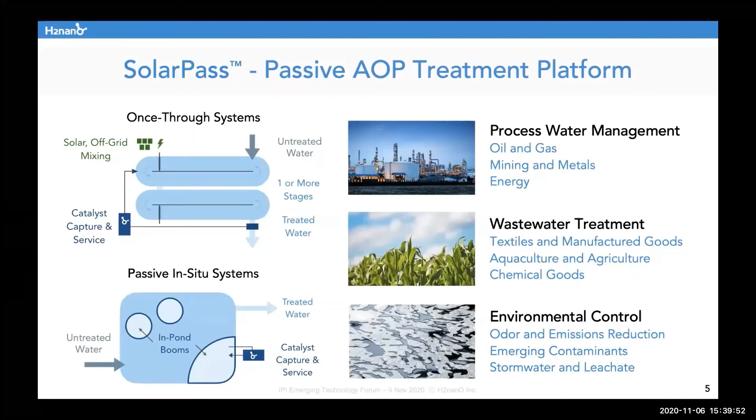So H2 Nano's SolarPass has a few benefits. One of them is enhanced treatment, so we can deliver a new treatment capability for these persistent organics and odors in this advanced oxidation process in a new and passive way. That passive treatment process is greatly improving the treatment economics. We have a very simple infrastructure and process equipment to do this treatment, which reduces the capital expenditure, as well as reducing the operating expenditure by reducing those chemical and electrical inputs.

And it's safer and more sustainable. We can deliver that same kind of treatment that would otherwise require hazardous chemicals and a large environmental footprint.

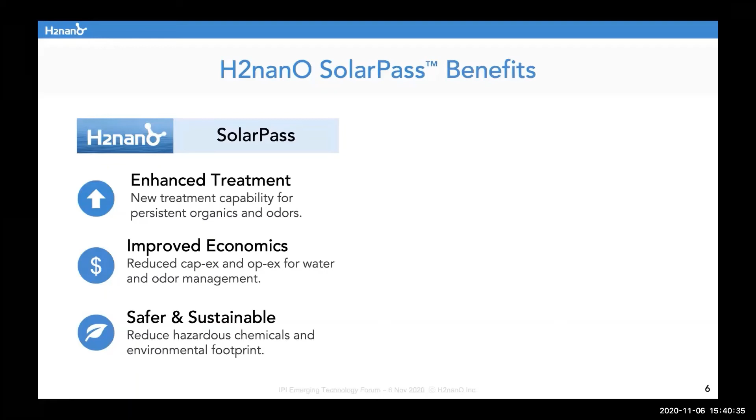H2 Nano's technology has been applied in a couple different settings, one of those being treatment of dissolved organics in an oil extraction process where we were able to use just one day of sunlight to take what would have been months to years potentially of holding time to eliminate aquatic toxicity from some of the processed water. As well as applying it in a setting where we've done treatment to eliminate and reduce some of the odorous compounds from outdoor holding ponds by being able to get rid of over 70% of the emissions from some of those pond systems by deploying our technology.

So H2 Nano is looking for new treatment applications. We have a ready team of world-leading experts in photocatalysis. We've deployed some of the largest outdoor treatment processes for this kind of technology that we know of. And we are looking forward to being able to examine how we can apply that for your treatment application, or look at new process integrations where partners may be looking for enhancing their current service offerings or being able to integrate H2 Nano's technology to further enhance biological and chemical treatment processes that you're using today.